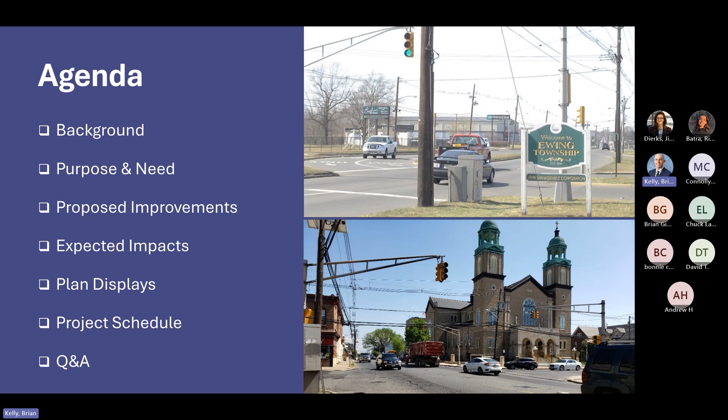So the agenda for today: we're going to go over a little bit of the project background, cover the purpose and need, talk about the proposed improvements and some of the expected impacts. We'll look at plan displays and then a project schedule, and then we'll have questions and answers in the room here. If you're online, please submit your questions in the chat and we'll respond to them at another time, but we do want to get a record of any questions.

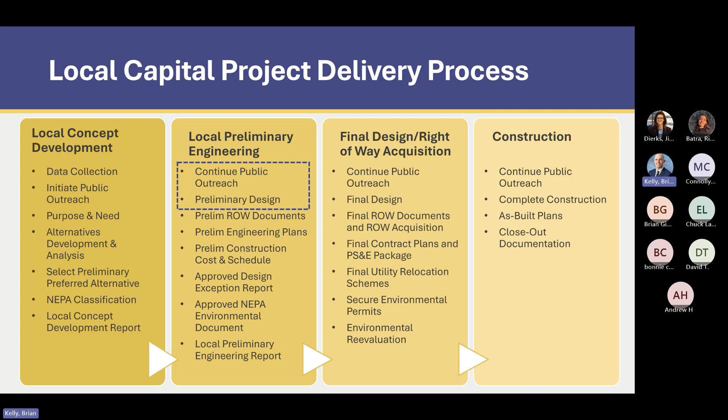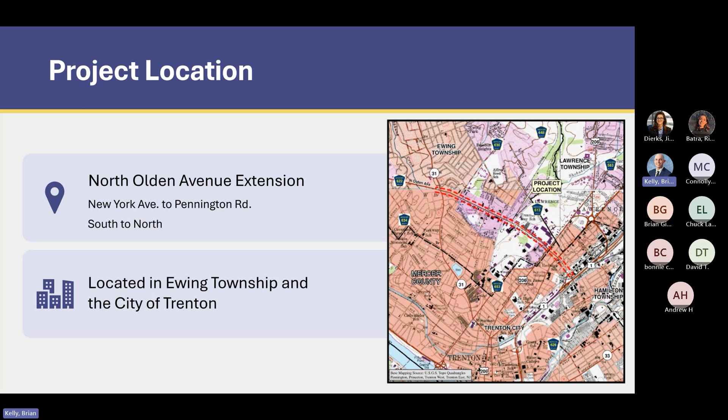Project location, obviously you're all familiar with that. It runs from North Olden, it's on North Olden Avenue. It runs from New York Avenue to Pennington Road, south to north generally. It's about 1.75 miles in length, located in Ewing and the City of Trenton.

North Olden Avenue is classified as an urban minor arterial, which means it's not a local street. It's a major carrier for county level highways, not a state interstate. It's 2 lanes in each direction with a speed limit that varies between 25 and 35 depending on the location. There are 20 intersections through this segment, and 8 of them are signalized at this point.

The majority of the project area carries 2 lanes in each direction with a 2-way center turn lane, and this large segment is nearly all commercial. The portion from Princeton Avenue to New York Avenue is 1 lane per direction with on-street parking, and it's more residential in nature. Overall, North Olden Avenue carries just about 10,000 vehicles per day on average.

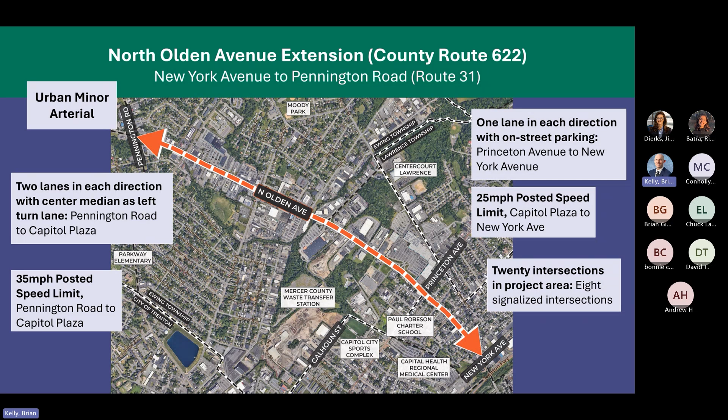The existing sidewalk contains many obstructions, including utility poles, signs, other roadside features, and driveways that limit the usability of the width of the sidewalk. Most of the sidewalk is not ADA compliant. It's thin sidewalks, there's not nearly as many ADA ramps, and they're mainly substandard.

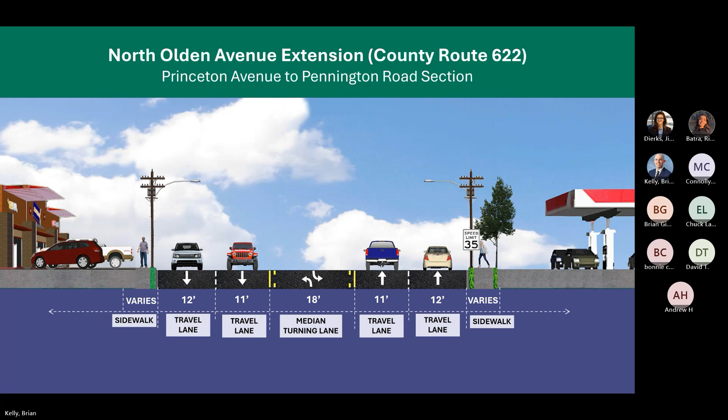As you get down from Princeton down to New York Avenue, obviously it changes. As I said, you're more into a residential area. The existing roadway features 1 lane in each direction, and it varies in width, with some on-street parking and very close buildings.

Like Ewing, the existing sidewalk path contains obstructions that limit the usable width of the sidewalk. The sidewalk is not ADA compliant. While the area does contain some allowable temporary on-street parking, vehicles often park in prohibited areas, even on the sidewalk, adding to congestion. The illegal on-street parking is a safety concern.

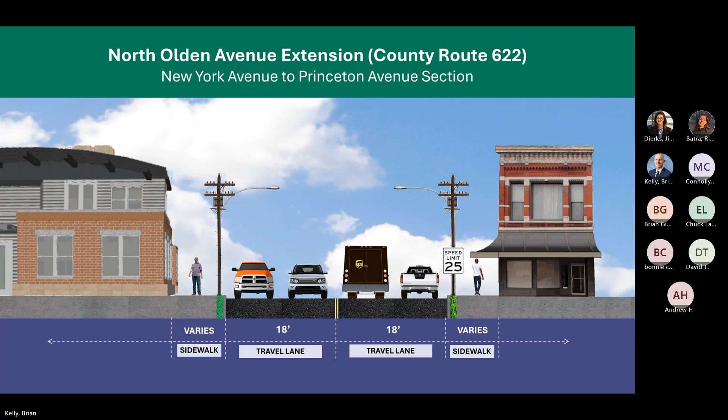So what is the real project purpose and need here? Ideally, it's all safety based. Over the course of 2018 to 2022, there were 723 reported accidents along this corridor. Prior to that, there was an additional 250 to 300 vehicular accidents and crashes, which basically brings it over 7 years to almost 1,000 crashes through this corridor. So safety is a big concern.

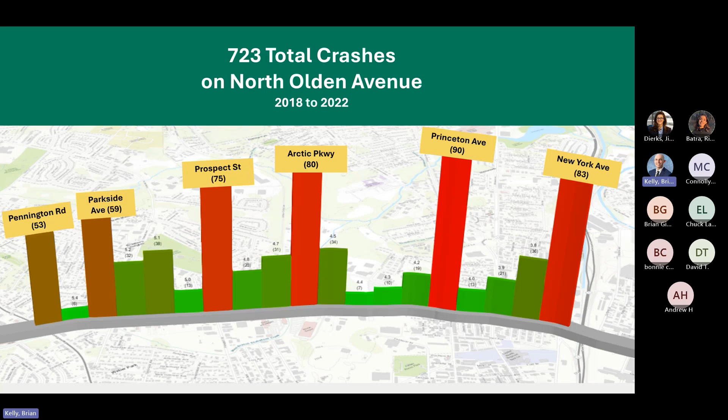Of those crashes, there were 18 bicycle and pedestrian crashes, which is a major part of our purpose to make it safer for all users of the road. It's not just vehicles, it's bicyclists and pedestrians - it's a multimodal setup.

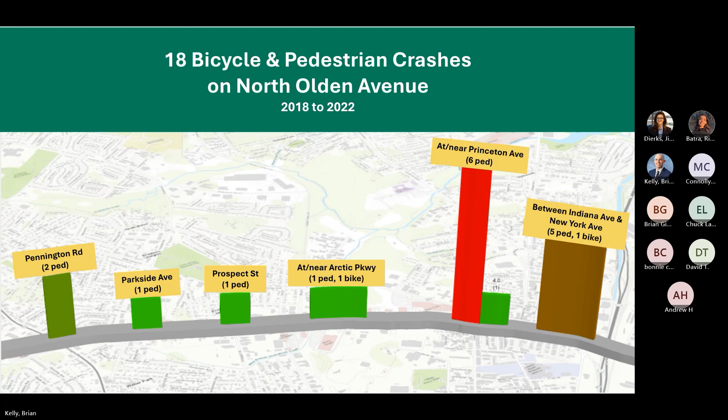So the project purpose and need here is to improve the safety and traffic operations and the mobility for all the users of the North Olden corridor, including motorists, pedestrians, bicyclists, and transit users.

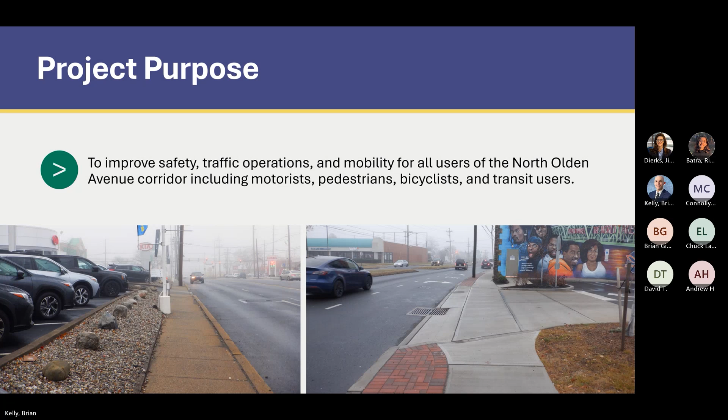The goals here are to improve the traffic safety, congestion, and intersection operations, and highway access for all users and properties. We also want to improve the safety and mobility so pedestrians, cyclists, and transit users can use North Olden more effectively.

We want to address stormwater management and flooding regulations throughout North Olden Avenue. We have identified areas that flood out and want to fix them the best we can. It's not an overall major rehab, but we want to clear the road of standing water and flooding during heavy storm events.

And we want to actively implement improvements that facilitate the complete streets policy of Mercer County, Ewing, and the City of Trenton. That again goes back into having a facility that's usable for all pedestrians, bicyclists, transit users, and motorists.

And obviously, last but not least, we want to avoid or minimize socioeconomic, environmental, and property impacts, and minimize disruption and maintain access during construction. So that's a big part of our plan development.

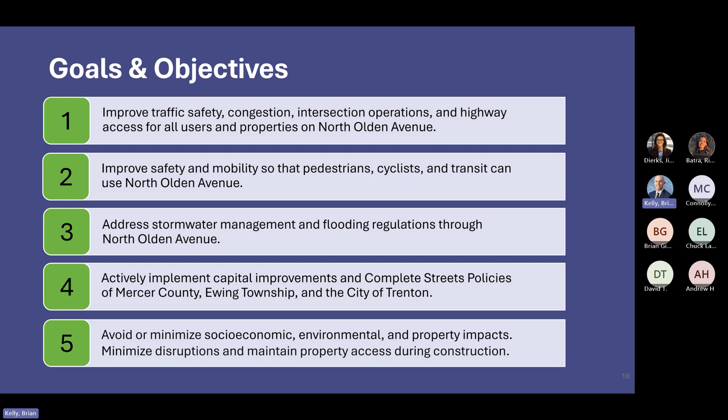So at this point, I'd like to let Brian Kelly, the project engineer, take over and walk you through the proposed improvements. He'll get into some details of the specific areas, and then at the end we'll break for more specific questions at the boards. Thank you. Great.

Thank you, Scott. Hello, everyone. How are we?

Just like to reiterate that this PIC is specifically held to gauge the opinion of the public and gather questions from you all. All these proposed improvements that make up this project have been evaluated over a number of years, as Scott had mentioned, and we are trying to limit the impacts to the public as much as possible. We're still in the design phase, so this is valuable time for us to hear all of your thoughts and take those into consideration. As we mentioned, if you hold your comments till the end of the presentation, that'd be appreciated.

So this is the schematic of the roadway improvements for the corridor, as you can see over here. We'll have time to delve deeper into that after the presentation.

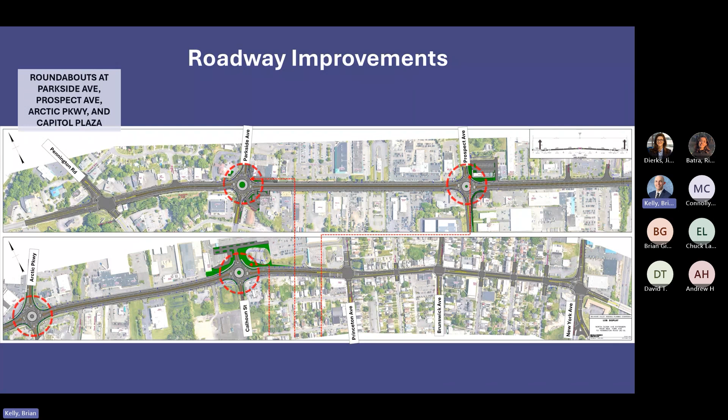But the primary roadway improvements, as you've seen, are the addition of 4 roundabouts in place of signalized intersections. Those are at Parkside Ave, Prospect Ave, Arctic Parkway, and Capitol Plaza. Roundabouts are a proven safety measure and lead to a 78% reduction in fatal injury crashes as compared to signalized intersections. So all going back to the safety aspect of this.

Any remaining traffic signals are going to be upgraded to be ADA compliant, feature push buttons, and all upgraded facilities at those traffic signals, which should also aid in the timing of the lights and aid in alleviating congestion.

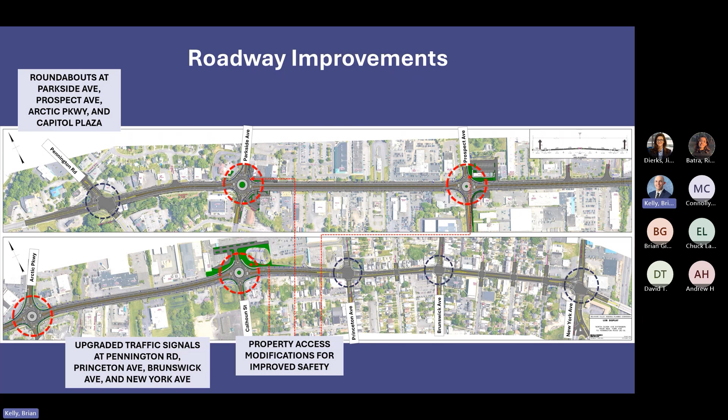There are a good number of property access modifications, driveway and parking lot modifications, mostly in those areas of the proposed roundabouts that require a different footprint than the roadway currently has. Additionally, we are proposing a raised median, 4 feet wide, and a buffered bike lane with a 2-foot buffer and 5-foot bike lanes in either direction, and 8-foot ADA compliant sidewalks. Throughout the entire project area, deteriorated curbs and driveways will be replaced in kind or modified to improve safety and general functionality.

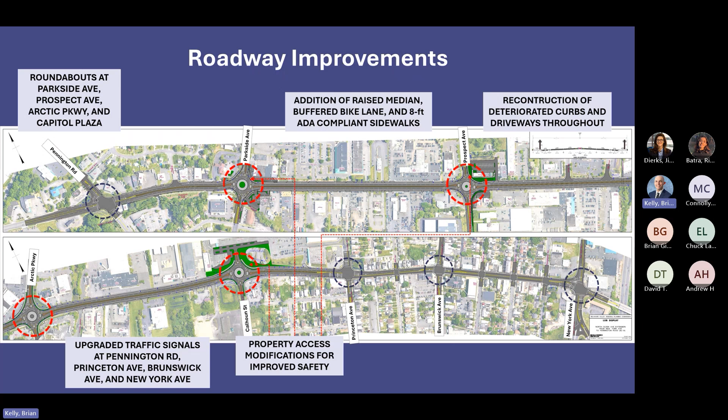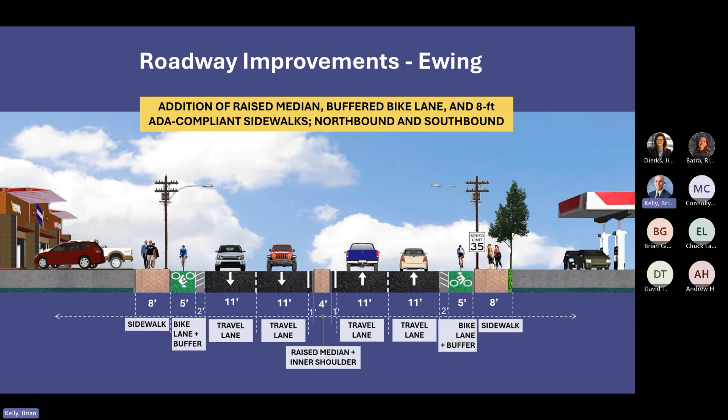So this is the proposed typical section through Ewing. In lieu of that turning lane in the center, we're now proposing a 4-foot raised median that eliminates the left turn lane or left turn movements in both directions. 11-foot travel lanes, 2 in each direction, are proposed. On the sides of those, 2-foot safety buffers, and then 5-foot bike lanes, which will be striped and painted green, a standard treatment for bike lanes. As far as the sidewalk goes, we're proposing an 8-foot sidewalk, which will essentially extend to the existing right-of-way line, the existing property lines. That will achieve ADA compatibility and pedestrian movement through these areas.

As far as the roadway improvements in Trenton, the roadway itself won't be significantly modified, but the primary improvement is restriping of the roadway to include left turn lanes at the necessary intersections. Again, reconstruction of deteriorated sidewalk and driveways, and ensuring that the corridor through here is ADA compatible as well.

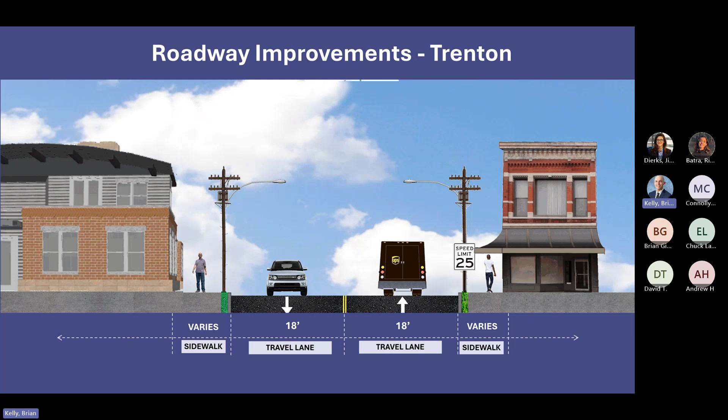Scott mentioned on-street parking. We anticipate that to be greatly reduced. Right now, there's a lot of variability in the time limit of parking, block to block. There's different treatments, and that kind of leads to a free-for-all, with a lot of cars parking where they choose. There isn't necessarily parking stalls or anything like that. So this is a bit more of an enforcement issue as far as police goes, but we are trying to reduce that on-street parking.

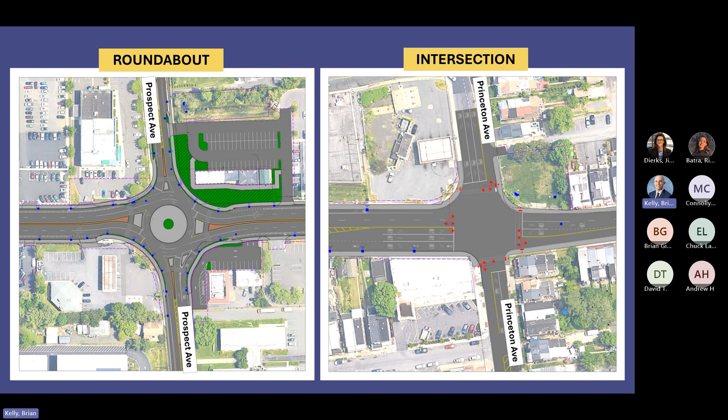These are just two zoomed in typical areas of a roundabout and a signalized intersection. Those purple dashed lines represent temporary easements that would be required for the construction of sidewalk, the reconstruction of parking lots and so on. The vast majority of the easements and right-of-way involvement for this project are temporary and mostly sidewalk, driveway, and things like that, which would be short duration easements due to the ease of constructability for some of those smaller improvements.

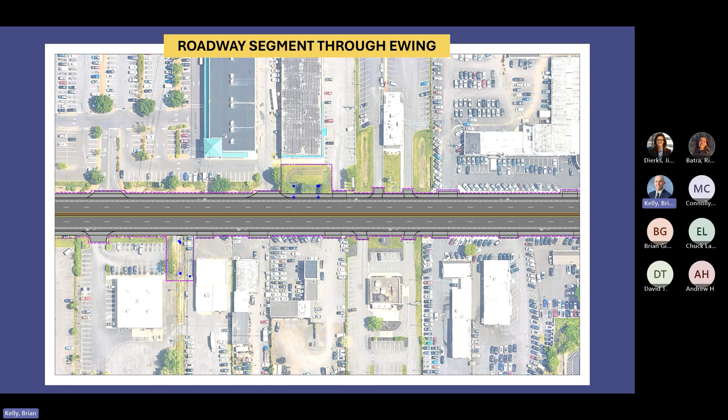This is just one of the straightaway tangent sections of Ewing. Again, that reiterates we will need temporary construction easements for the majority of every property really, for replacing in kind and improving those sidewalks and providing clean new driveway aprons and so on. You can see here those two blue marked out areas that are a little larger.

Trenton doesn't have as much involvement right-of-way wise because there's already a lot of sidewalk already out there, but we will be providing proposed crosswalks and rapid flashing beacons for those crosswalks.

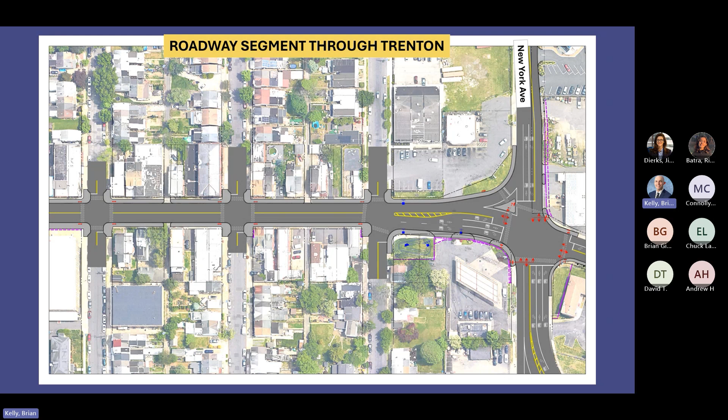Just a couple examples of the signal and intersection improvements. One really obvious one is the crosswalks, improved crosswalks, which feature that continental, ladder striping that you see there.

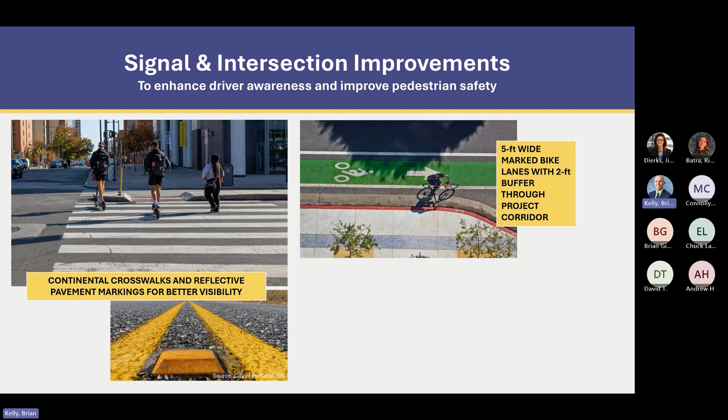Upgraded striping for better visibility, pavement markers, the RPMs that have reflective properties to them. That's a good look at what that bike lane would look like on the outside of either direction of the road, which would be painted green and would have a 2-foot buffer between that and the live travel lanes. And then improved lighting throughout, mostly at the roundabouts and signalized intersections. Lighting is proven to increase the safety and drivability of a corridor.

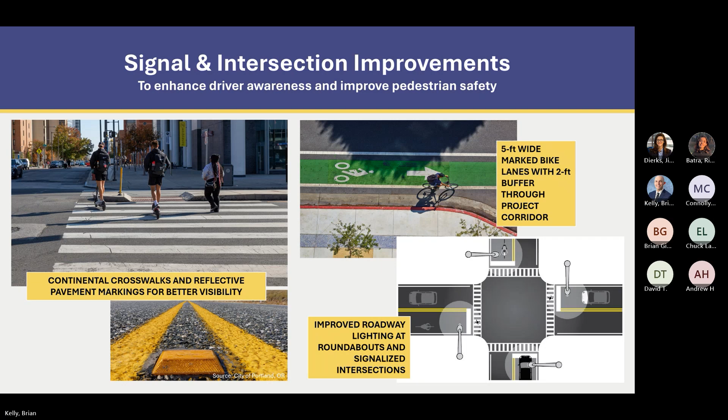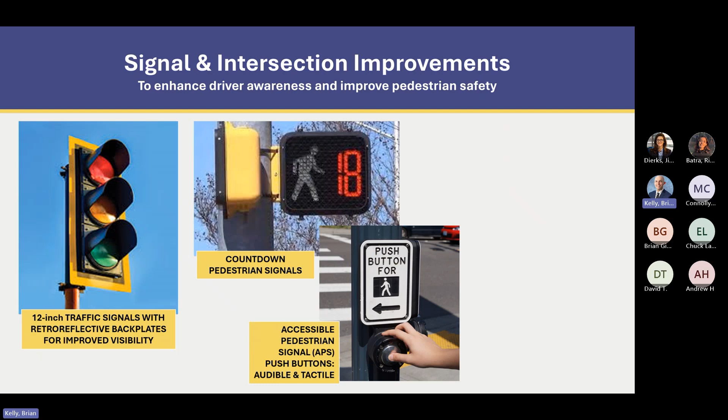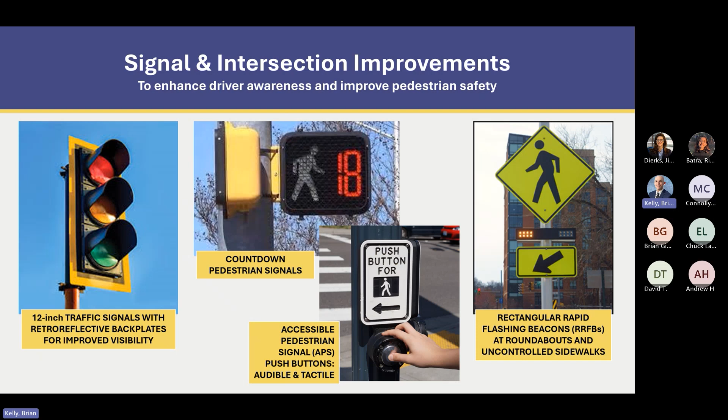Those would all be replaced throughout the entire project area with bicycle safe grates and NJDEP compliant curb heads. We would be replacing all old and deteriorated drainage pipes with new reinforced concrete pipes. We'd be increasing the amount and efficiency of the inlets and pipes to reduce flooding. It's a full-on drainage, stormwater management design throughout, with larger pipes and many additional inlets to collect that stormwater. It's all about safety and keeping water off the roadway.

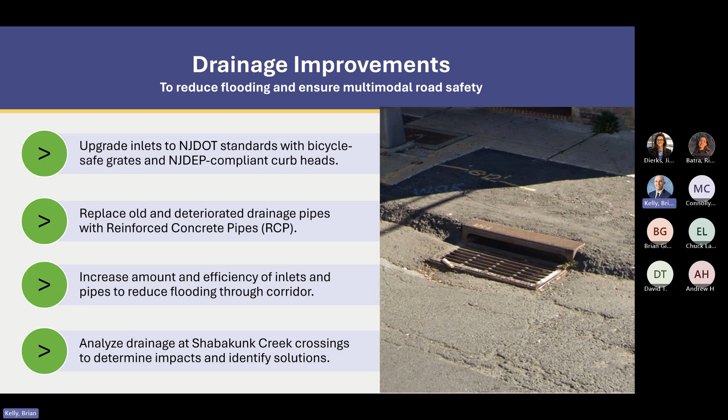We'll also analyze drainage to and from Shabakunk Creek to make sure we're not impacting any of the hydraulics and hydrology of the Shabakunk Creek. So a couple of those stormwater management improvements.

Two great examples are wet ponds and bioretention systems. Those are similar but slightly different - one kind of holds water more on a permanent basis, and one is only meant for short term. This can be called rain gardens. These would control water quality and quantity, and ensure that the total suspended solids are at acceptable levels.

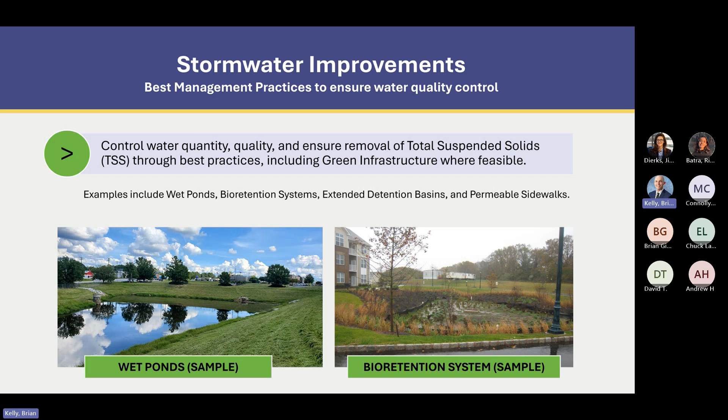We'd also like to propose porous pavement and permeable sidewalks where available. We're looking into the specifics of where that's feasible. Most likely it would be in areas not traveled by vehicles due to the strength of that material, but think on sidewalks - there's great technology coming out where the water flows straight through the sidewalk, and you don't need as many actual drainage facilities to combat the water.

So for environmental, we touched on that - we're, as part of the PE phase, trying to get our environmental document approved. We don't really have many environmental impacts, honestly. Wetlands, parks, endangered species - none of that has any anticipated impacts. Cultural resources, the history of the area, and different facilities, are currently under investigation to make sure any of those sensitive cultural areas are not disturbed.

So for our permits that are anticipated, there's an NJDEP stormwater management or major development permit, a flood hazard area permit, and a Mercer County soil erosion and sediment control certification. There is also the Shabakunk Creek Park, which is between Pennington and Parkside, and we anticipate no impacts to that park.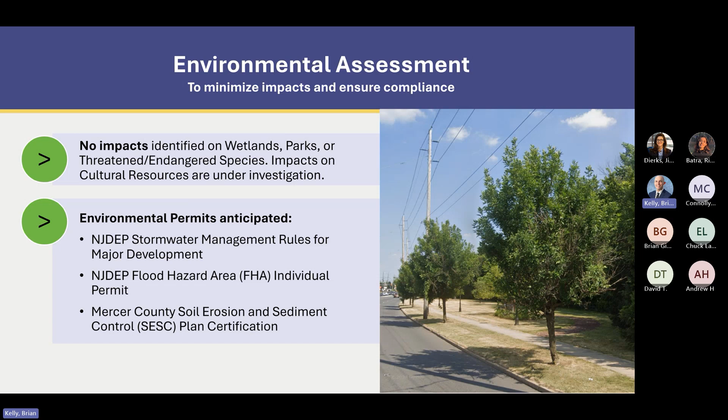So taking all these improvements into account, obviously we have some impacts, both temporary and permanent - right-of-way impacts and modifications to existing driveways and parking lots are anticipated throughout the project limits. Some of the more substantial ones are listed there, as you can probably see on these displays.

There's a number of access modifications proposed, which can include consolidation of driveways on some of these lots that have more access points than really should be allowed. Again, it's a safety concern.

There's a lot of parking stalls throughout on private property that encroach over the existing right-of-way, or the backing of vehicles out of these parking stalls require the vehicle to either cross over sidewalk or into the shoulder, which is definitely a safety concern, and we're trying to look into all that.

For right-of-way, we're currently anticipating 90 temporary construction easements. That's many, virtually all of the properties through Ewing. And as I mentioned, it's mostly for those sidewalk replacement kind, or driveways, or the widening of sidewalk. All should be temporary, all should be short duration for some of those.

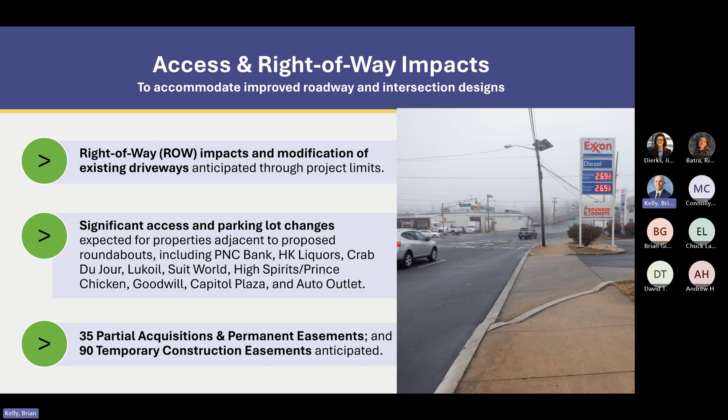For utility impacts, the roadside of North Olden Ave, as you probably know, contains a huge amount of utility poles. They're carrying electric, fiber optic, and telephone wires throughout the area. This is a common sight here, and that has a lot of negatives, mostly for pedestrian use.

So we are proposing an 8-foot sidewalk, which is wider than the existing. In doing so, we're trying to reduce the number of utility poles that need to get relocated. We're still anticipating 82 pole relocations throughout. Many of those are in the areas of the roundabouts where the roadway is getting widened and can't have a utility pole in the roadway. In areas like this, we're doing our best to not have to relocate every single utility pole out there. With a wider sidewalk and the resetting of a fire hydrant or a pole, we can get away with having that allowable width for ADA compatibility without having to relocate an excessive amount, even though 82 is certainly significant.

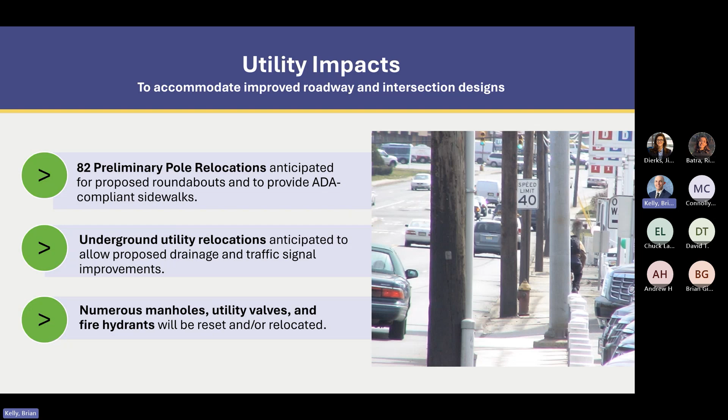Underground utility relocations are anticipated, although will be avoided if at all possible. There's sanitary sewer, gas lines, and water lines that run throughout North Olden Ave. There was just a new water line put in and an old water line abandoned in place as well. So there's a lot of underground conflicts. We're not doing a huge amount of underground work, but for any utility relocations, there's a lot of homework you have to do to make sure you don't have conflicts. And as I touched on, there are numerous manholes, utility valves, and fire hydrants that will need to be reset or relocated.

For the actual construction of this project, it will be staged construction, meaning 2 lanes of traffic will be present at all times through Ewing and 1 lane in each direction through Trenton. Lanes will be shifted one way and the work zone will be on the opposite side of the road, then the reverse will happen. So it will be something around 4 or 5 separate stages. Nighttime or off-peak construction may be required to accelerate the work, and the detour along Spruce Street may be utilized as well. We're anticipating drums for a lot of the work zone protection, or for more permanent, serious work close to travel lanes, concrete construction barrier.

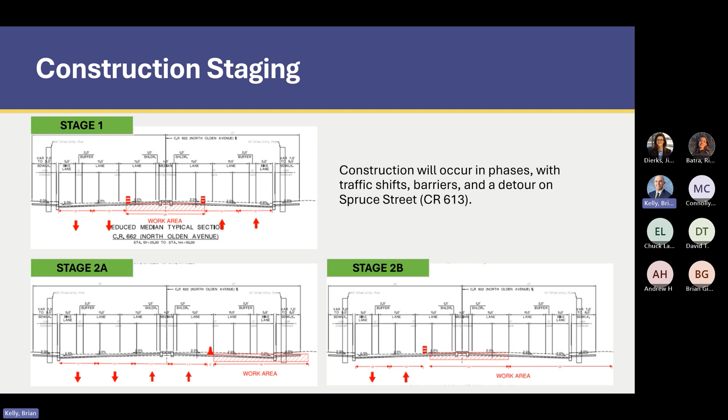Stage 1 would involve pushing out the lanes to the edges, which they kind of already are, and flattening any medians that are currently grass medians or divider islands, to allow us to use temporary pavement and move lanes onto them in the next stage. Stage 2 would be moving all traffic to the more northern side of the road and doing work on the southern side, the roadside, the sidewalk, the driveways. Stage 3 would be the reverse of that. Stage 4 would finally be moving traffic back to opposite sides of the road and constructing that raised 4-foot median. Stage 5 would be a minor stage involving final pavement work, striping, and so on.

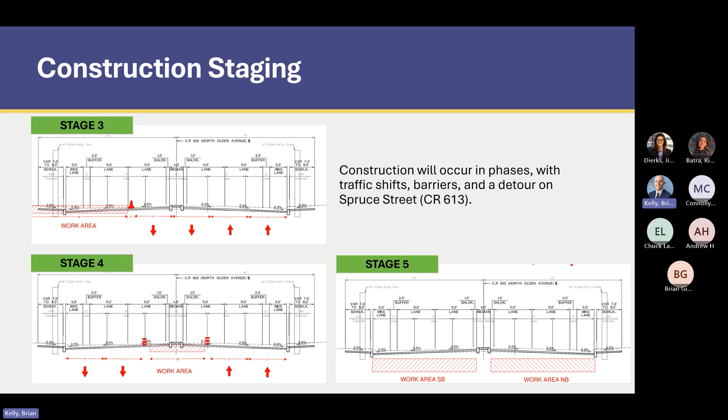For the project schedule right now, we're in preliminary engineering, as we mentioned, and we're anticipating finishing that in fall of this year. A lot of moving parts, funding, and so on needs to happen before we can start final design. We're anticipating that in summer next year, and that'll be about a 1.5 to 2 year phase. We're hoping to start construction, if all things go well, in fall of 2028, and we're looking at about a 2 to 3 year construction.